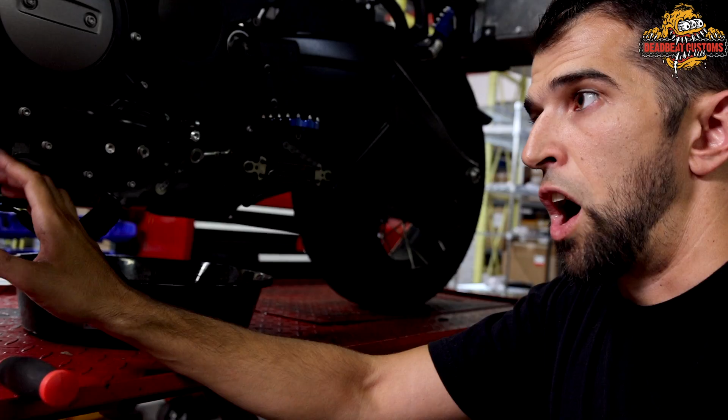So first things first, load the bike in neutral, get it hot. They ask you to remove the skid plate. The skid plate that is located underneath your bike comes off. There are 4 Allen bolts on the back of the skid plate, and then towards the front of your bike on the side mounts, which are right here, there are 2 Torx bolts. That comes completely off. Get it completely off, get it out of the way.

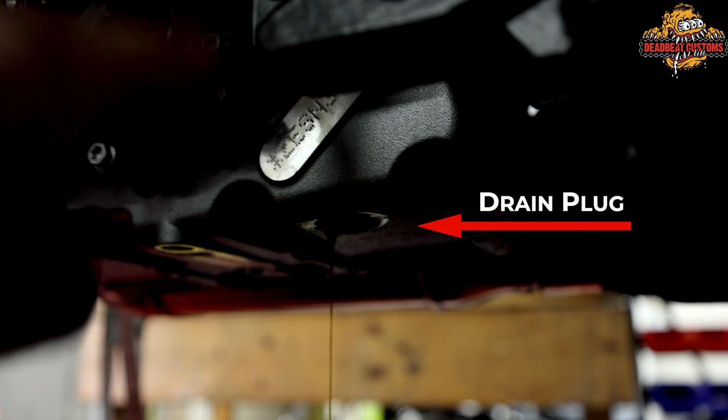And then the drain plug, which is a 13mm bolt, is located on the back of the motor. This is not like your other Harleys where there were 3 drain plugs, everything was separate. We have 1 drain plug, which is right here. So your drain plug is located right there. You can see here's my engine numbers. Your drain plug 13mm bolt is right there. Get the bike hot, loosen up that screw, drain the oil out of the bike. So we're going to let the bike finish doing its thing.

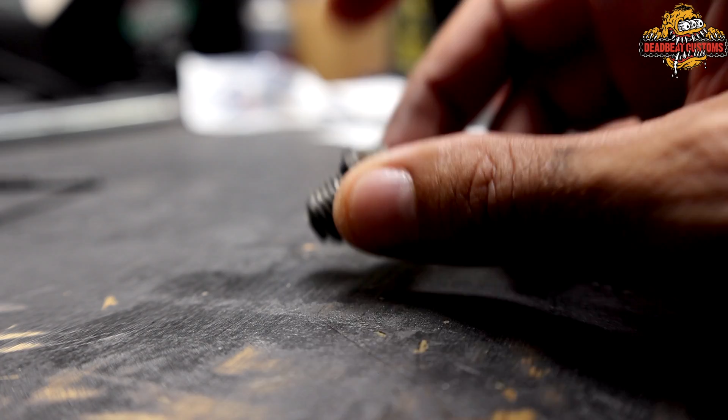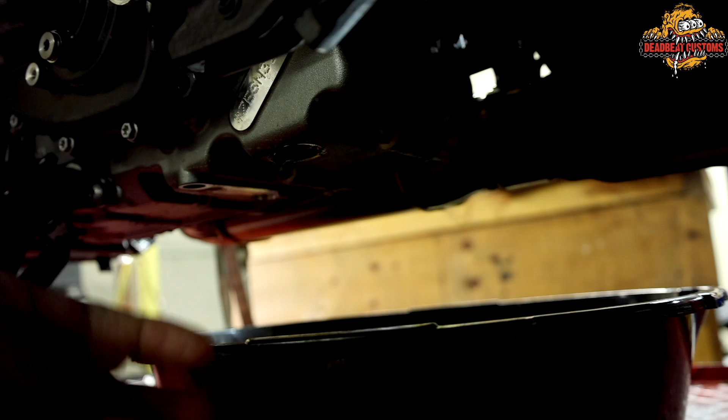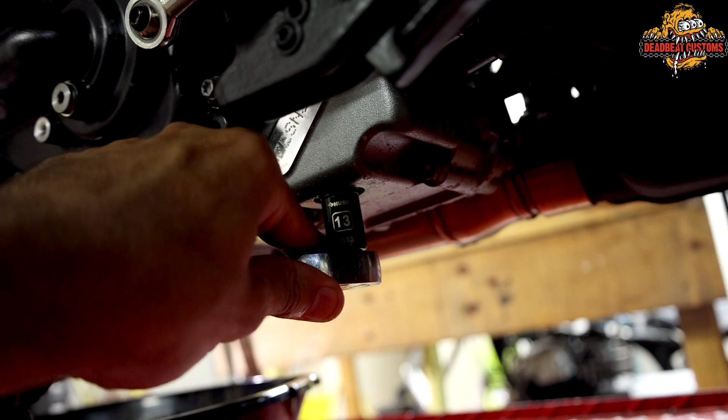Alright, so jumping into the oil change, first thing you want to do is obviously replace the O-ring on your drain plug, which I'm going to pick off right now. The O-ring part number is Harley Davidson part number 1900045. That is a Revolution Max specific O-ring. So, new O-ring, going to reinstall the drain plug now. All the oil is pretty much drained out, it's dripping just a little bit, so that is fine. Finger tighten the drain plug and then snug it up with your ratchet. The service manual calls for 15 foot-pounds if you have a torque wrench.

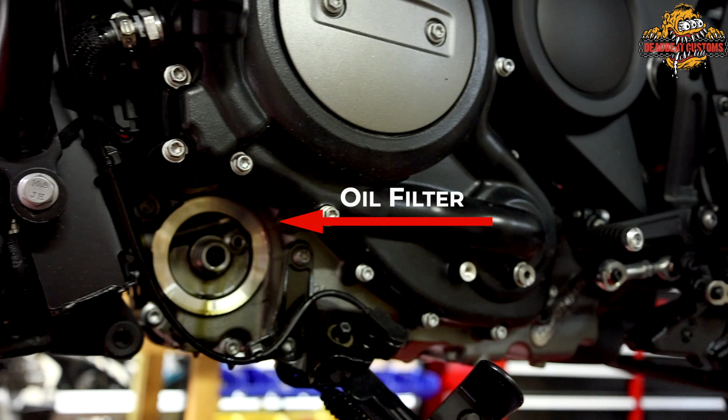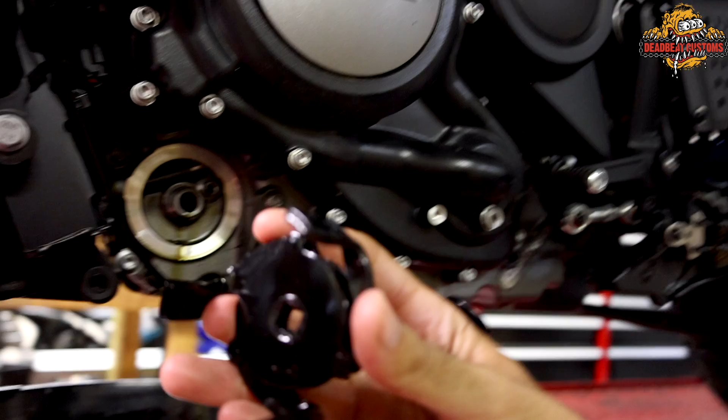Then you want to remove your oil filter, slightly smaller than all the other Twin Cam oil filters. So my oil filter wrench that I had from Harley did not work. I think they make a separate one for the new Rev Max motors. I ended up using this little Jaws of Life looking oil filter wrench I got from Napa for 10 bucks to grab the oil filter and get it started.

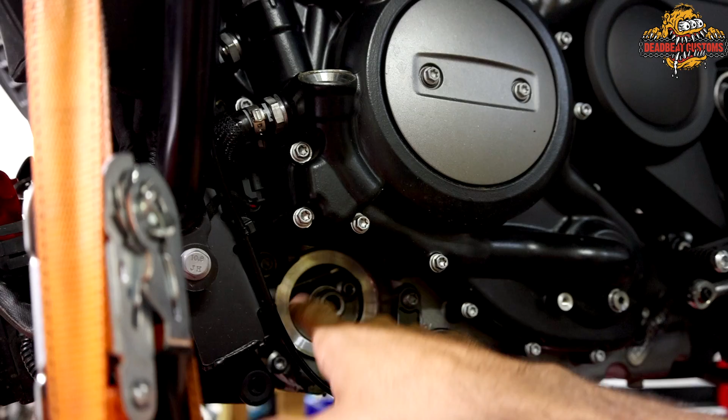Once you take the oil filter off, you want to clean out this area of all the oil and then lube the oil filter O-ring and spin it back on and hand tighten it. So I'm going to do that now.

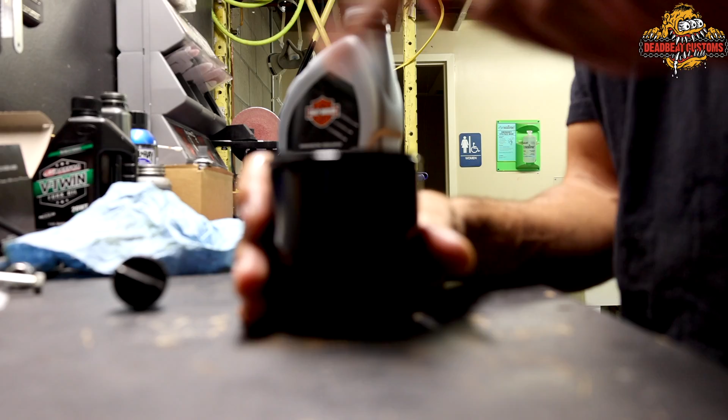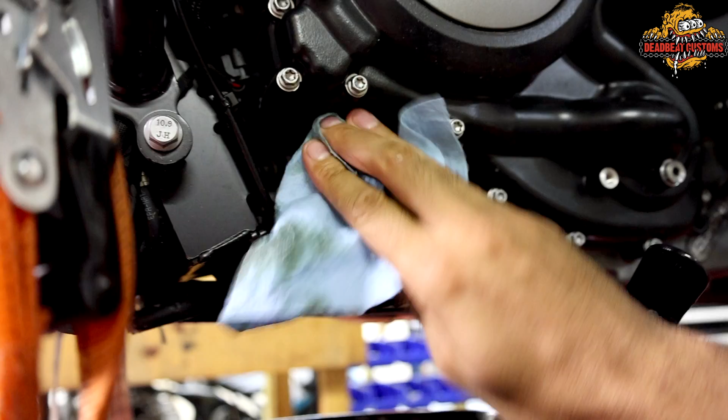The oil filter. Wipe off all of your residue, everything that leaked. Wipe off your drain plug.

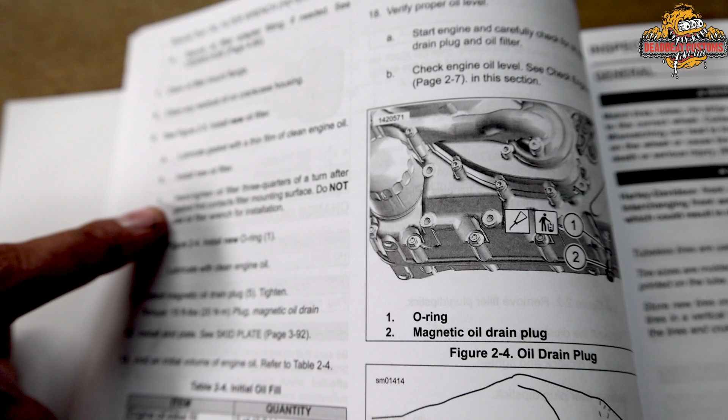And then we're going to put oil in the bike. Lubricate gasket with a thin film of clean engine oil, install new filter. Hand tighten oil filter 3/4 of a turn after gasket first contacts filter mounting surface. Do not use oil filter wrench for installation. That goes for all motorcycles.

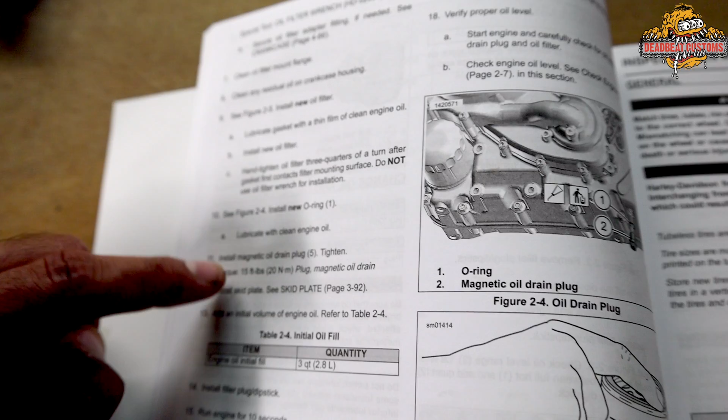Lubricate with clean engine oil. Install magnetic drain plug. I already did that because I didn't want to make a mess on my lift. Install our skid plate. I'm just going to do that afterwards.

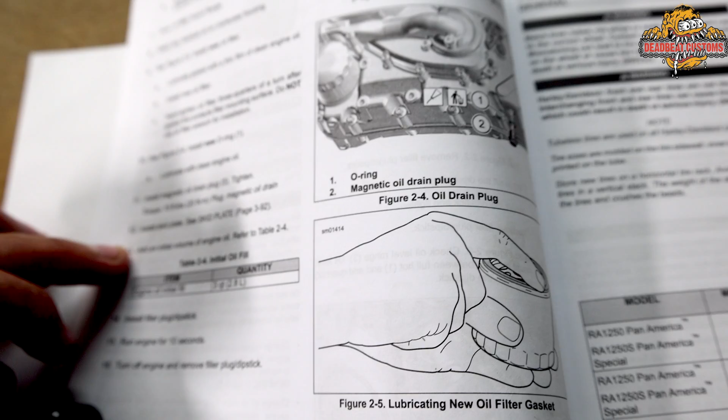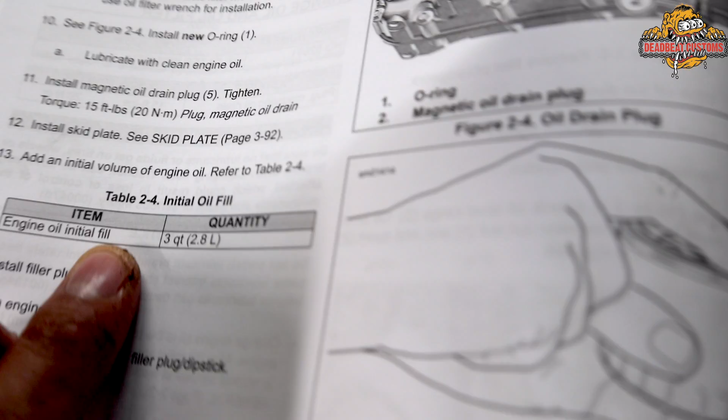And then you want to add an initial volume of engine oil, which it says refer to table 2-4. So table 2-4 is right here. Your initial fill is only calling for 3 quarts. And then you want to run the bike for 10 seconds, turn off engine and remove filler plug and dipstick. And it says add only enough oil to bring level to the add quart mark on the dipstick.

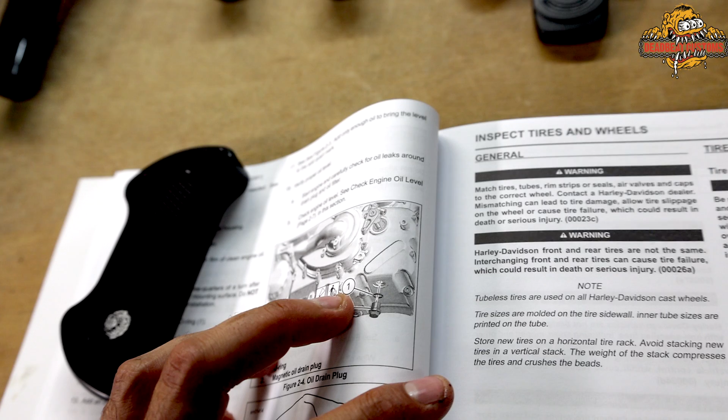Then you want to start the engine again, check for leaks, and then it tells you to refer to check engine oil level. So on your dipstick, you have a couple markings. So you have an upright fill. And on the other side, you have a side stand fill. And that side stand fill, if you see it, there's 3 markings.

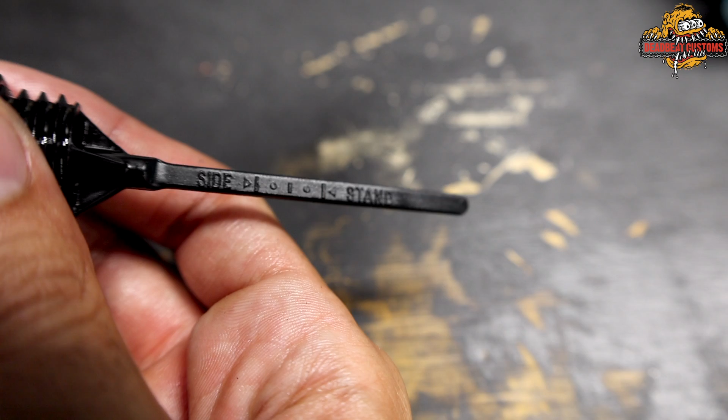There's a low, there's a high, and then that middle mark is where you want to be after your second hot check. So first check is 3 quarts. You should be at the low check, and then once you get the bike hot, you want to top it off, and that top off mark should register right in the middle. So we're going to go ahead now and add 3 quarts of oil to the bike.

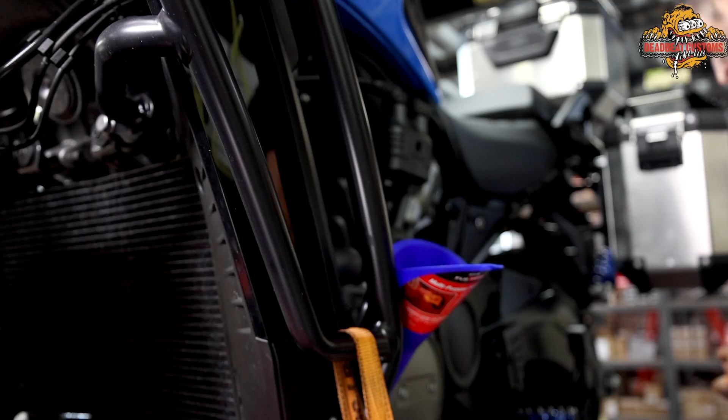Alright, so my skid plate is back on. My initial 3 quarts are in the bike. It says to run the bike for 10 seconds and then check it again. So that's what I'm going to do, set the bike up, let it run for 10 seconds.

And since I'm on a lift, you want to do the second check on your side stand. It actually calls to do the entire oil change on the side stand, but I have a bike lift, so why not utilize it? I did the oil change on my lift. I'm going to do the hot check on the side stand after the bike warms up.

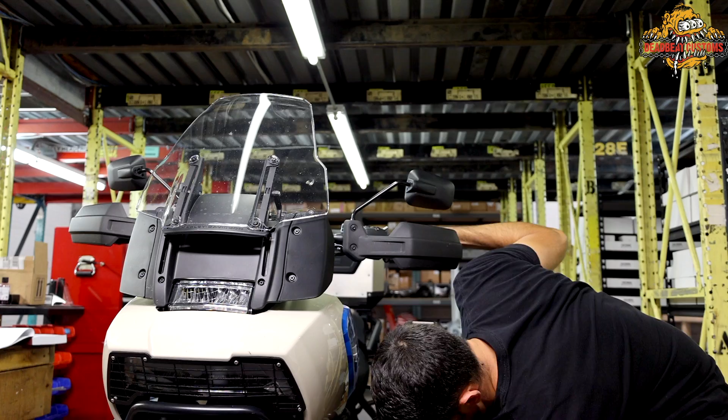Alright, so I put the bike on the side stand, let it run for 10 seconds, and pulled out my dipstick, wiped it off. I'm going to check the oil level. You want to screw it in all the way, back it off.

Again, there's 3 markings on the stick. It does look like I am at the lowest marking, so I want to go up to the middle marking, which will be right where I need to be. So I am now going to use my quart of oil to do just that.

About 3 and 3/4 quarts of oil, and I'm going to do my final check. Looks like it's registering right in the middle. What I'm going to do is ride the bike, and then when I ride the bike, I'll check it one more time to make sure when it's really hot that it is at the middle level as well, but it should be fine.

That is how you do an oil change on a Harley-Davidson Pan America.